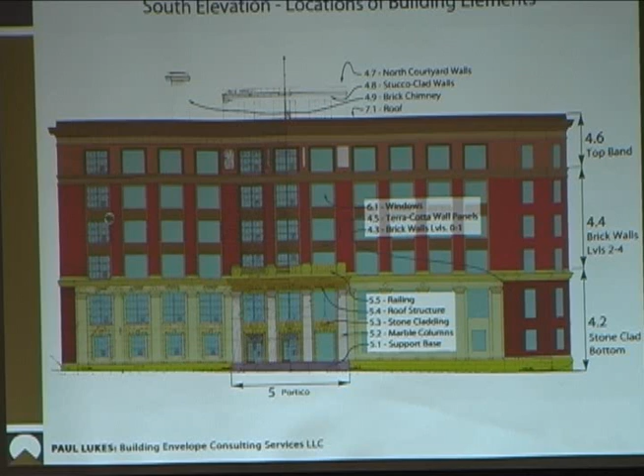All of these materials are porous to some degree and allow some water to get into them, and that's been one of the issues, is that the water management of the building has caused some deterioration over time. And it's an 80-year-old building, and those buildings exposed to this kind of weather just have a problem. So as we go through, I'll show a little bit of the issues that we're talking about. This slide shows all 3 of those materials.

The terracotta, as well as some of those horizontal bands that I talked about, actually borders the windows. It's a very decorative portion of the building. If terracotta cracks, some of the joints can allow some water into the system as well. And then the lower area, the white area, is stone, and there's stone used, not only the marble on the columns, which I talked about was from Prince of Wales Island, but there's some other stone, which is either a limestone or a sandstone, both of which look about the same and have some of the same physical characteristics. In this case, it's used for windowsills, so it's kind of a horizontal ledge.

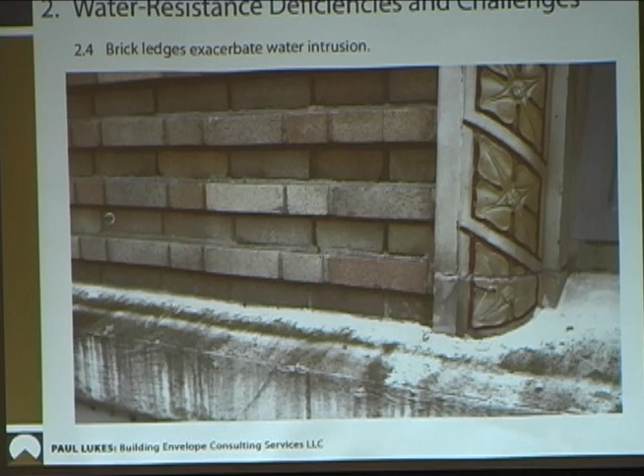Horizontal ledges tend to collect dirt and moisture, and they can grow moss, which tends to deteriorate materials as well. It's also a very brittle material and it can crack. It's white in this location, in this photograph, because over the years a lot of the stone has been coated with an elastomeric or a rubberized coating, and that served its purpose to protect those materials from water damage. But that material now has lived its life expectancy, and it's starting to degrade a little bit too. So it's time to remove that and do something else.

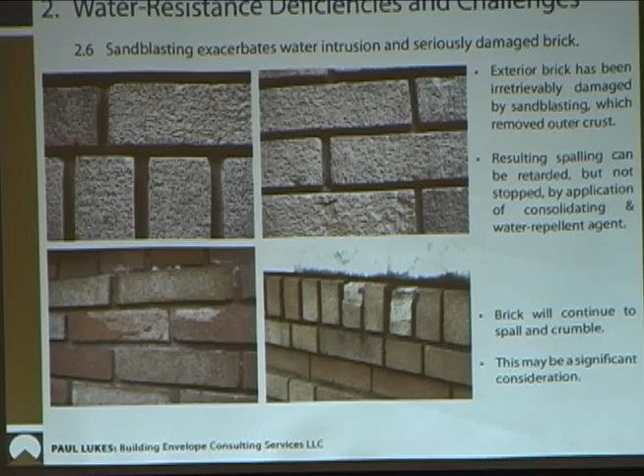And this slide is a little more close-up of the brick. You can see the coarseness of the surface of the brick, and then what happens when water gets into the brick. It flakes off surface pieces of it, and this happens in several places throughout the building, and it's one of the issues with the brick.

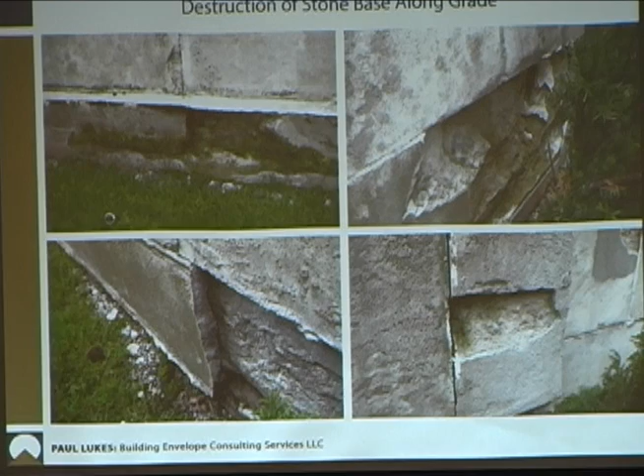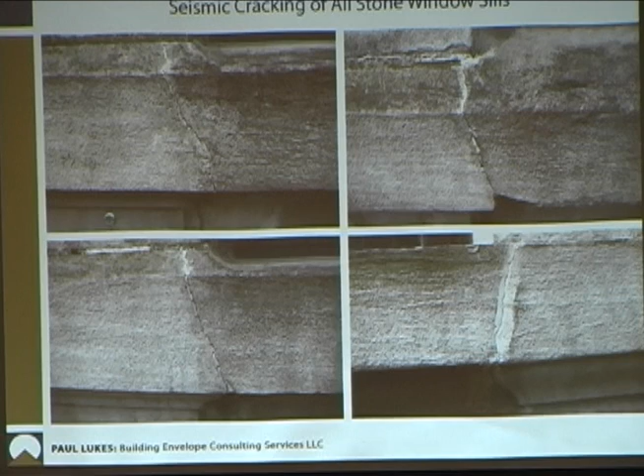so when that happens, the building wants to try to rack a little bit, and the brittle materials will tend to crack, and you can see a lot of the corners of the windowsills have actually cracked in kind of a diagonal pattern, and that's very, very typical of damage that's caused by earthquakes. These aren't going to fall off by any means because they go way back into the wall, but they're cracked. When they crack, then they allow more water in, so the degradation can continue.

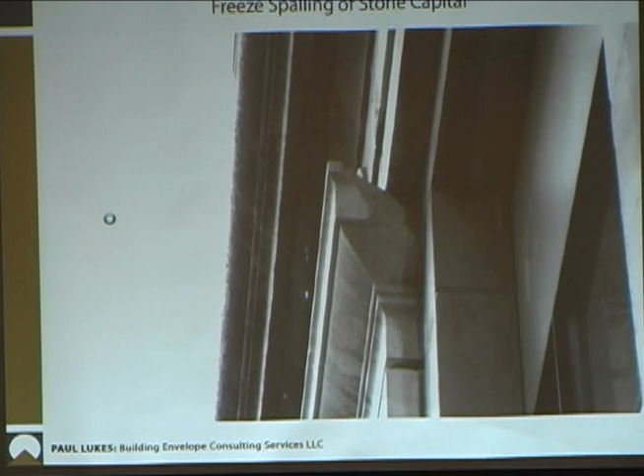And then this is one of the areas of the stone. This is probably the worst situation, but this is a piece of stone that fell off several years ago, fell into the lawn. When they do crack and water gets into them, it could expand, and so there could be pieces that come off the building.

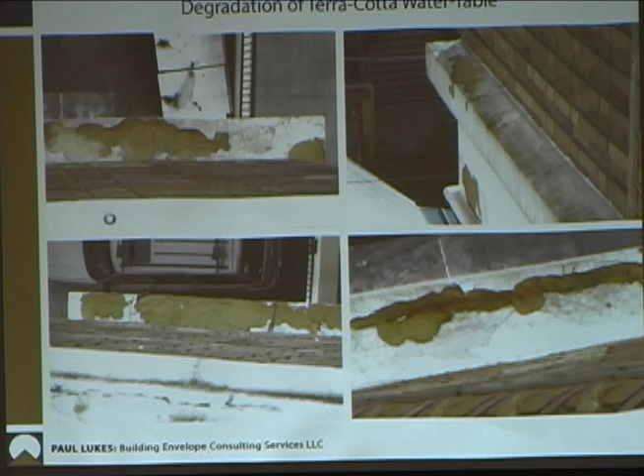This is a little confusing, but this is a photograph looking down from the roof. There's a band of terracotta between the 4th and 5th floors of the building. You can see the white is the remnants of the elastomeric coating that was put on several years ago. The brown is the terracotta, and so once this white elastomeric coating deteriorated, the terracotta underneath continued to deteriorate, and now it's gone in many places, and so the deterioration is going to continue.

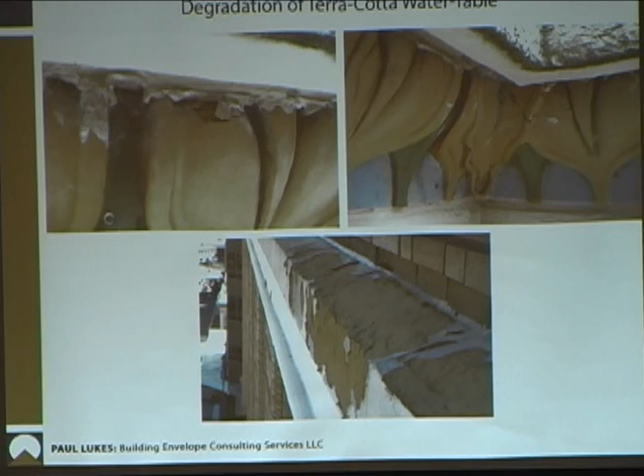And this just shows the underside of that. There was some decorative terracotta between the 4th and 5th floors, and when the water does get into it, it carries on through, and it'll cause some residue as it exits.

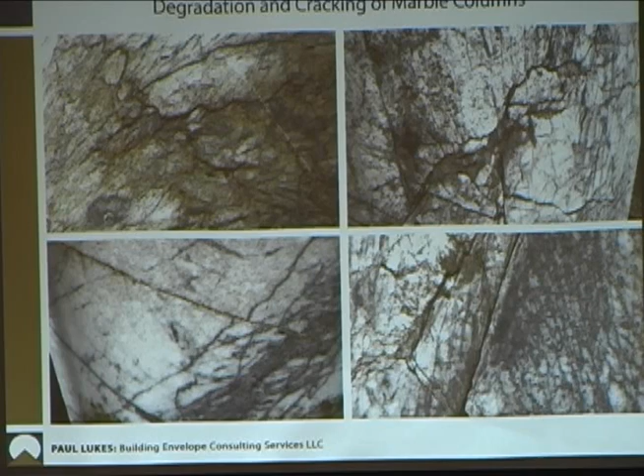So a photograph of the marble columns. Now this is enlarged considerably, but there are some cracks in the marble columns. The marble columns are like 3.5 feet in diameter, so they're really big. There is some surface cracking there. One of the things we'll be doing is sealing this with some epoxy just to seal it up so the water doesn't get into it anymore. But it's an issue that needs to be addressed.

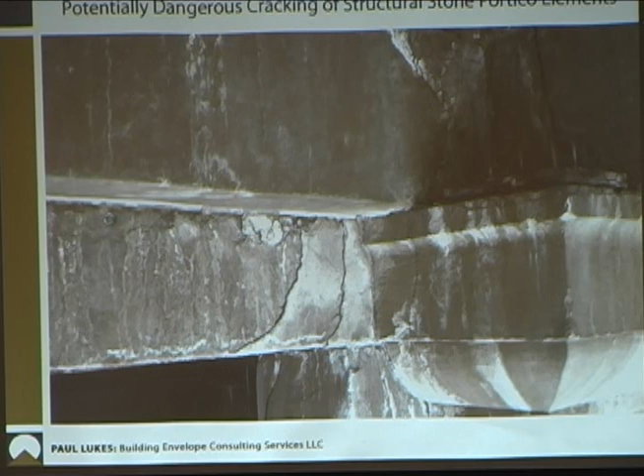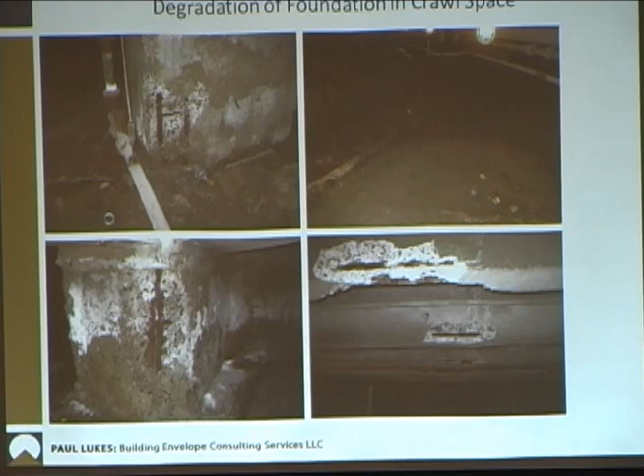So this is another issue that we need to address. It's not a structural issue. The reinforcing bar is fine, but it needs to be fixed. And there's several indications of this across the ground floor, and that'll be the first thing we address, some of these issues.

The purpose of this investigation that started last fall and the restoration design is twofold. One is to address the structural integrity of the building, primarily relative to seismic forces, which are lateral forces, which we understand a lot more now than we did 80 years ago when the building was designed.

And then secondly, to look at the envelope of the building, the brick and the enclosure of the building, and the condition of that. It's an opportunity to do both at the same time, because what we're anticipating is reinforcing the building seismically by making the walls stronger. When we're doing that, we can address the condition of the walls at the same time. The building structure is poured-in-place concrete from the foundations all the way to the roof. There's columns, beams, concrete floors, a concrete roof.

And the brick and the stone is an applied wall. It's not bearing. It's just filling in the voids between the concrete frame. So the concrete frame can be reinforced by putting in some more concrete shear walls, they're called. So you have the columns setting up and the beams going across. What you do is you fill in the area between those columns. So instead of allowing the columns to do this, they're stiff, and they'll reduce those forces.

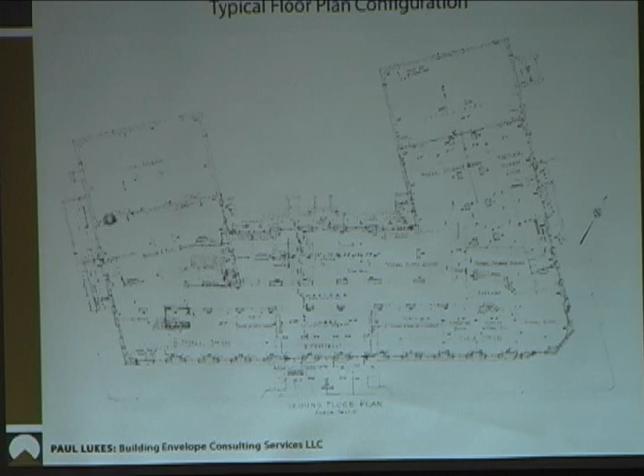So, that copy was a copy of the original drawing. This is another copy of the original drawing, and you can see what I'm saying. These were from the original drawings. They actually took these foundations down deeper and founded it on that good layer.

The floors, all the floors, the columns, beams, all the way up to the roof are concrete. They're well reinforced, and structurally the building is fine to resist vertical loads, which is snow loads and people and furniture and all that. The only thing it isn't adequate in is resisting lateral forces that we understand today. And so putting in these concrete shear walls along the outside of the building will address that. The rest of the building is fine.

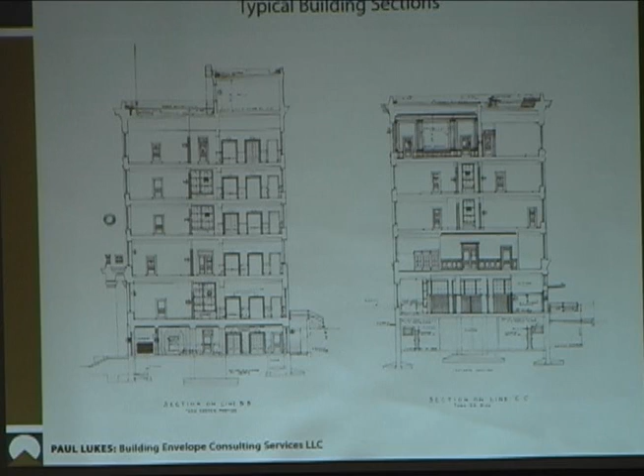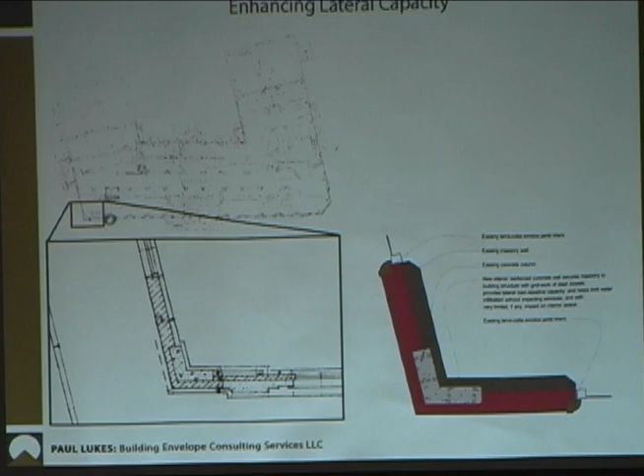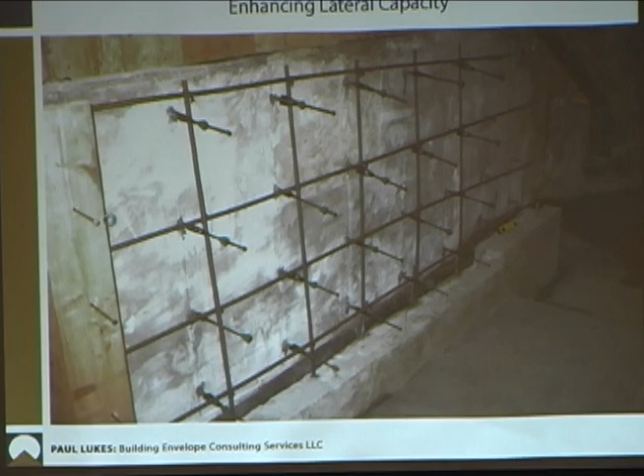And this is an example. This isn't on the building, obviously, but this is an example of what that could look like, where we would form up against the existing wall or another form, put a series of reinforcing bars and then concrete, and connect those from column to column and floor to floor. And we're leaving the windows, however.

One of the things also that was lacking from the original building was there were a lot of horizontal ledges. And those horizontal ledges tend to collect water and dust, and they can grow algae and moss, and that tends to erode whatever material they're on. So on all the large horizontal ledges, we'd be putting in new metal flashing, which would be copper, which would be appropriate for a building of this age and this type, so that water would tend to run off quickly and not stand there and soak in. And so that would be a way to do it without really affecting the appearance very much.

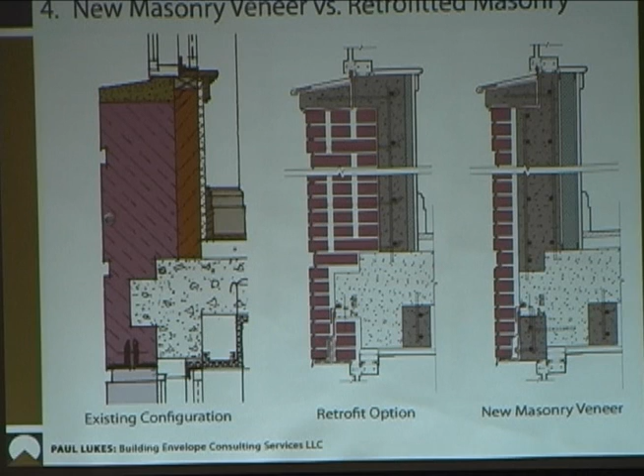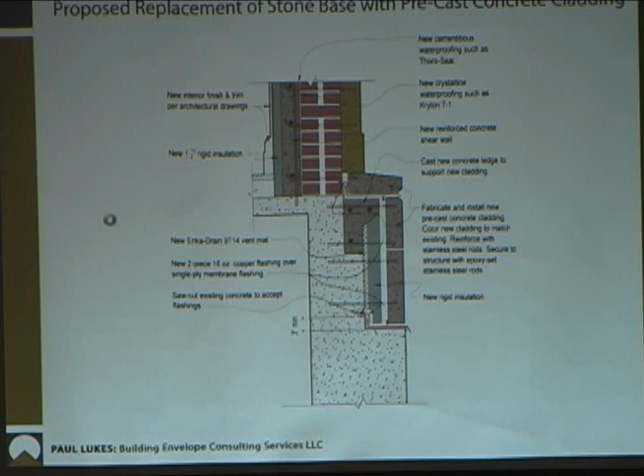And then this is a section of the base of the building. You saw that one drawing that showed the deteriorated stone at the base of the building. I think that's deteriorated to the point where it can't be saved, and we'll be replacing all of that with precast concrete, a very high-density precast concrete, which will have the same appearance. The finish of the concrete will have the same appearance as the stone. So historically, we'll be replicating the original appearance of the building.

And then another important issue is we'd be restoring the cornice of the building with appropriate material. You can see we look at metal flashings over the top. We think one of the problems originally was that this top of the cornice, which is probably 3 feet wide, had a top that we think was either concrete or probably terracotta, and it was a big, broad, horizontal ledge that collected a lot of water, and that's probably why it started to leak. The joints weren't perfect, but we can put this cornice back on, which does 2 things.

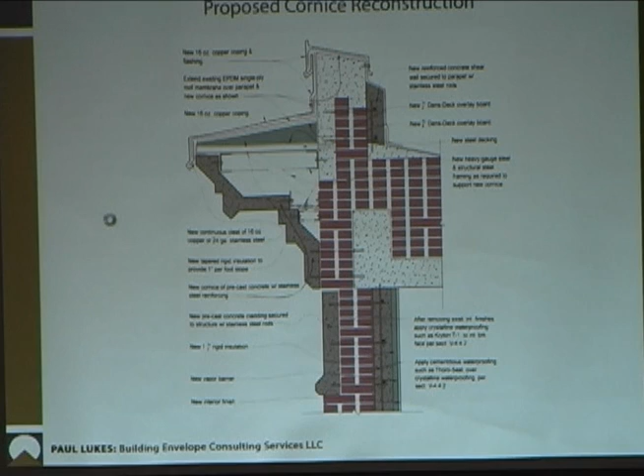It restores the historical appearance of the building back to the 1930s, but it also protects the walls, because it's kind of the physics of how buildings react to wind and rain, but a little bit of an overhang on the cornice affects the wind patterns around the building and actually protects the walls down below it. I didn't understand that as well until we were talking to Paul Lukes, who had some photographs that showed how just a little bit of a roof overhang can actually help protect the rest of the wall, because instead of the wind hitting the building, it tends to go up and over, and it tends to be intercepted and doesn't hit the walls as much, so it carries the rain with it. So it is a big help to restore the cornice.

And then this is a little more technical detail, but this is the portico. The portico is obviously the most recognizable component of the building. It's the front door. It has the Alaska State Capitol written across the front. It has these large, locally mined marble columns. But it also is an area that shows some of the most deterioration. As I showed in some of those photographs, the stone has allowed water to get through, and it's had some deterioration. So a lot of the upper portion of the portico will have to be replaced.

We're going to save the columns, and I've been talking to my miner friends about drilling a hole down through these columns about 3 or 4 inches in diameter, putting a large reinforcing bar down through it, and then filling the area with grout so that these columns would be securely held together, and then we'll seal the cracks that I mentioned with epoxy sealant to prolong those, and polish them. They've actually weathered a little bit, so they're not as smooth and shiny as they were 80 years ago, but we can polish them and bring them back to life.

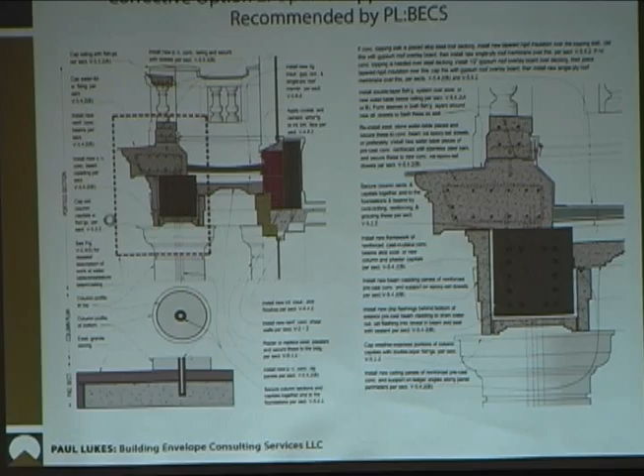Last summer, we put a little temporary protection over the front door. As much as anything, it was just precautionary and just to give people a feeling that there isn't any problem with the building, which there isn't. There's no indication that anything's going to fall out. There's nothing imminent with the building, but it indicates that it's time to do something with the building.

It's a very historic building. It's a valuable resource in the state's inventory. It's time to be fixed. It hasn't had any significant work done on it in 80 years. Well, probably aren't many other buildings in the state that are 80 years old, first off. But most buildings get some sort of work every 20, 30, 40 years, and this one's gone 80 years without anything significantly being done. So it's time to do that.

The plan is to do some work this summer. The first thing we'd be doing would be addressing the structural issues with the portico. Our plan right now is to not put the railing back on, but to do the structural work and reinforce the columns, replace the stone beams with concrete beams, and restore the structural integrity of it, and then leave that until the rest of the building is done.

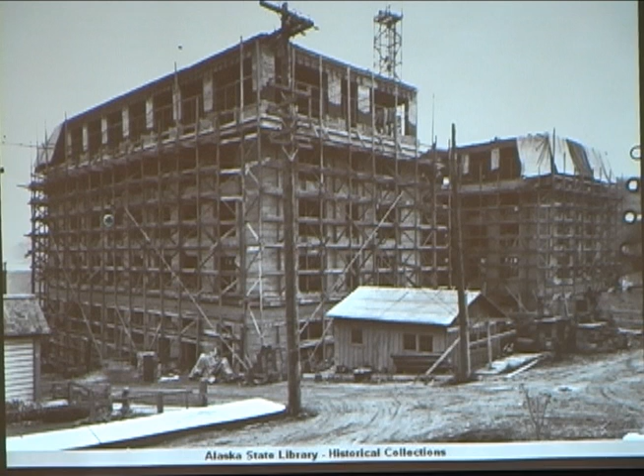So this is a picture of the building in about 1930 with the scaffold all around the building. Actually, Tim McLeod thinks it's a picture of the electrical distribution system in town. Bill, maybe you concur with that. It just happens to be at the Capitol site, but I think maybe he's wrong in that.

This is scaffolding all around the building when they were building the building originally in about 1930. If everything goes well, this could look about the same in 2014 and 2015 as we scaffold the building again to do the restoration.

So that's the end of the presentation. So if you have any questions, please fire away. Yeah.